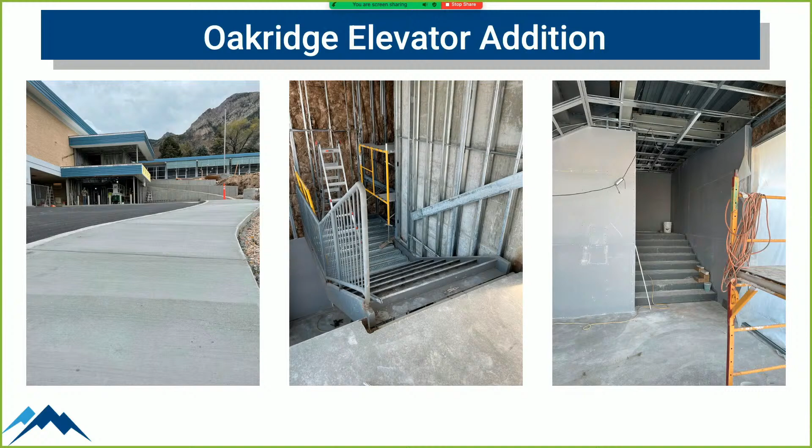So, new construction, we'll lead off with Justin on Skyline. You've had a chance to see the update there, and we'll talk through that just very quickly and then go to the photos that give you 1,000 pictures, show 1,000 words.

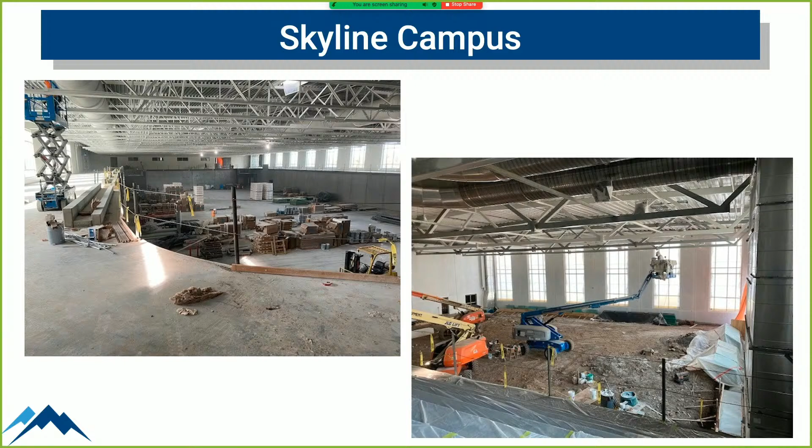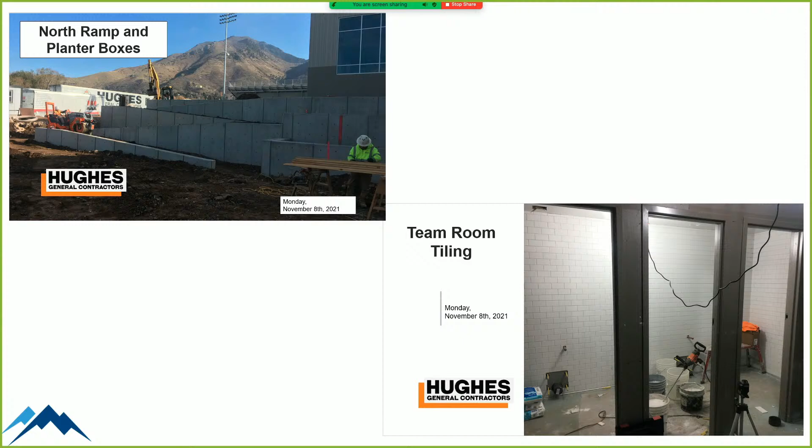You see the tile work down there in some of the restrooms below, in the team rooms, in the right-hand picture there, that white tile in the back. Paint in the team room, that yellow going in, ceiling framing and looking for lights and things like that in the lower right-hand corner.

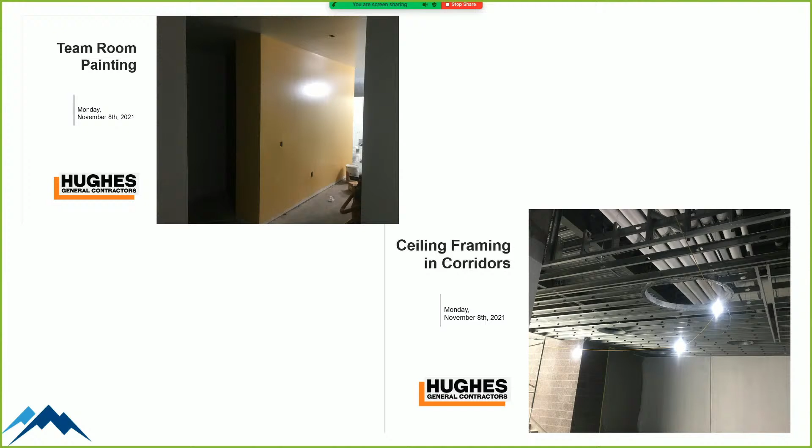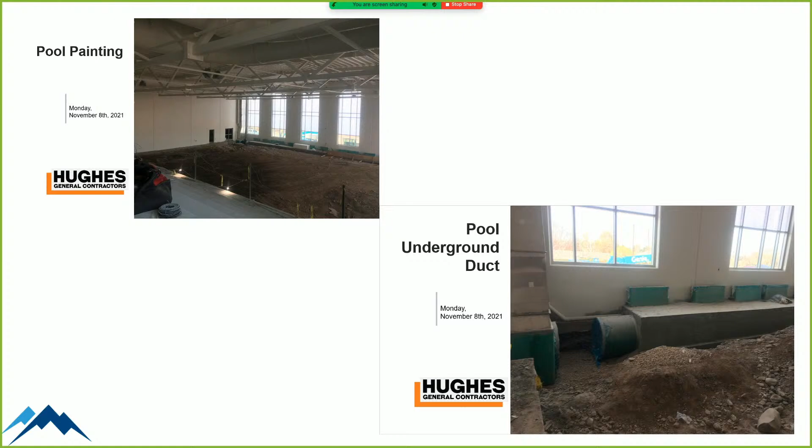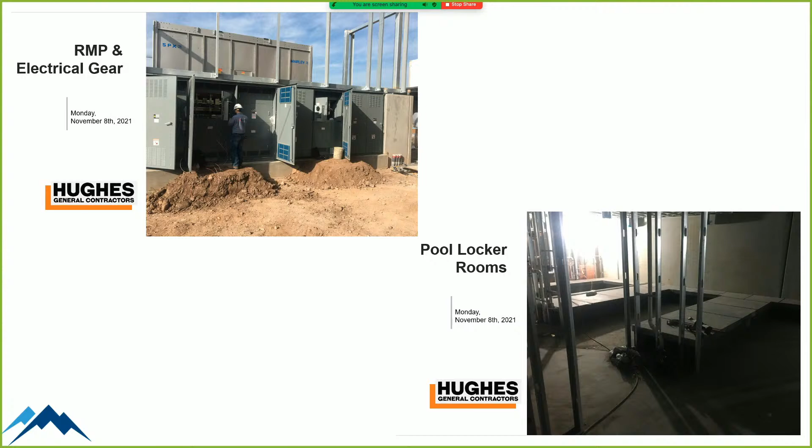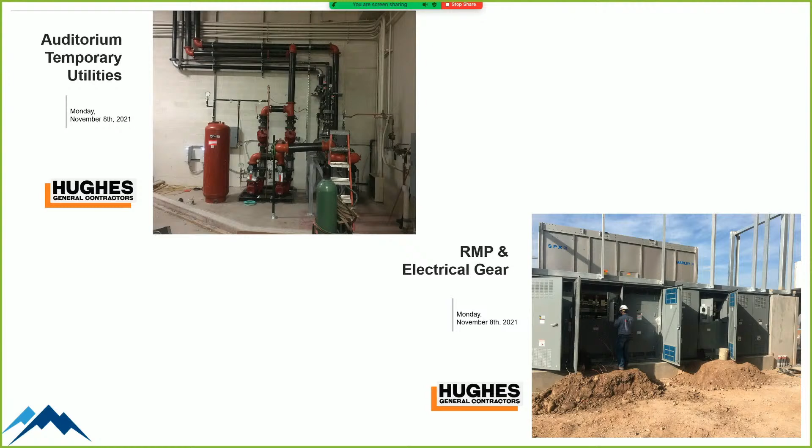And we're going to talk about change orders a little bit. We're trying to present to you as clearly as we can payments, change orders, and other items that we've done to advance the work. This is our attempt to take very complex tracking sheets and categorize them for you.

One of the things we wanted to talk about was the nature of change orders, because a change order is really a legal instrument to make a change to a contract document. It's not just the 15-page legalese that we sign. Contract documents include all of our plans, specifications, et cetera. So when Justin and I use the term change order, it means maybe 5 or 6 certain things.

For example, there's a change order that might be a no-cost change order. We want to swap something out, or add contract days. So that's a change order, but there's not a cost associated with it. There's a deductive change order, where we change something and get value back. And there's the dreaded additive change order, right? That's something that costs us.

Often the question is, well, what costs us? If the owner asks for a scope change, we ask for something else or something more, that comes in with the cost. If there's an error or omission in the drawing, there's a cost. I have an electric pump, but the electrical engineer forgot to show that power goes to the pump, and it costs $500 to run it there. Now that's a change order because the plans were not detailed enough to get them there.

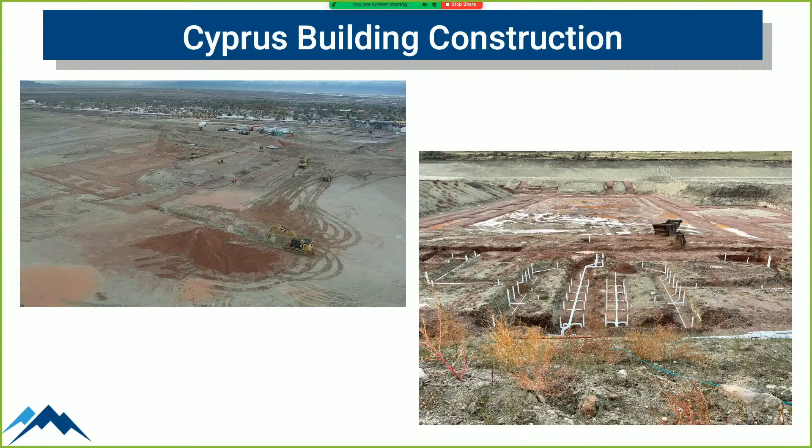You'll start to see some of that prep work happen as well, trying like nobody's business to beat really bad snowstorms and things of that nature. So there should be a good bit of activity, although I think there's been a good start that you were all able to witness while we were out there.

The next page is just, again, a similar tracking sheet. One of the items you see in your board packet today on the consent agenda deals with some value engineering. We were under the gun to quickly turn around a bid package, and I think we had 96 value engineering considerations that were thrown at us.

Under purchasing's advice, they said, well, if you think you're interested, take it. And if you know you have to do more research, we can always bring it back as a change order later.

In this case, a lot of these things, I think we listed a couple of simple ones. We had a very reputable cabinet manufacturer that said, hey, these are the cabinets that could save you money. We said, oh, that's interesting, we've never heard of that line. Let's take that line of cabinetry and do some research. When we got there, we determined it certainly wasn't suitable for our use and wore out too quickly. That's why we brought it back.

Same with the type of ball field lighting. It was of interest, we'd heard something about it. We couldn't not take it and then ask them to come back with it—we had to do it just the opposite. As we looked at it, it was more of a kit of parts. It wasn't a reputable manufacturer that we knew we could get consistent warranty work from, because they were assembling from three, four, or five suppliers to make a lighting system. After we got into that information, we said, oh, we don't want that. That's not of quality for our buildings.

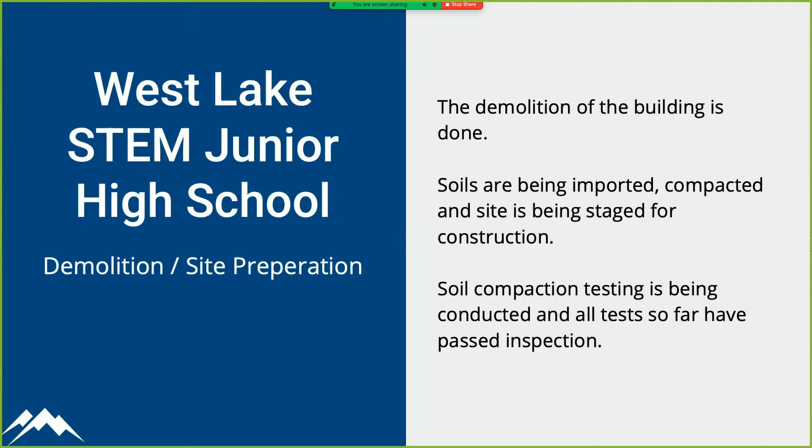Ben, could you change the slide? Yeah, thank you, good point.

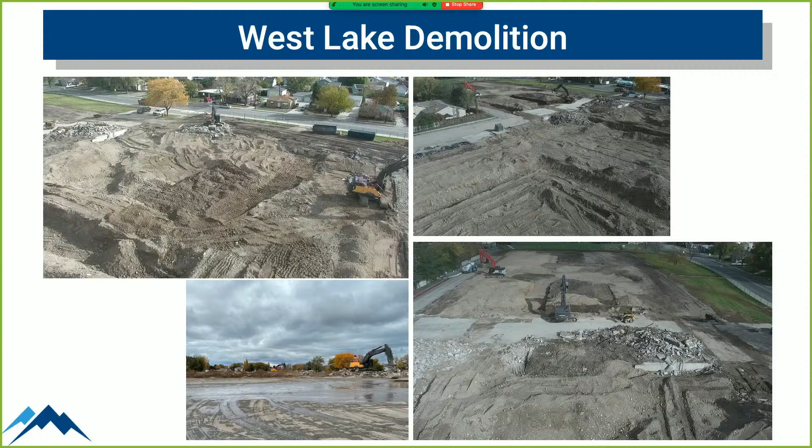Thank you. Some very nice photos from one of our guys, Jacob Perez, who flies the drone and does a great job—you can see some very nice images there. You're able to see kind of the progress as they were. This is not today by any means, but from the last couple of weeks as they were able to finish up and get the building out and dig out the footings. So I thought that aerial view is very nice.

Sorry. That's fine, you're good, Ben. Again, the same—yep, you got it.

Thank you, sir. The same tab we did for both Cyprus and Skyline. Good news is there's zero change orders to date right now, so that's good. Ben, would you jump one or two ahead? Let's see here—one more, please.

So the plan for bidding, we do it in two phases. The first phase is asking are you interested and qualified as a contractor to do this? Are you big enough? Do you have enough money reserves and staffing? That documentation was received by purchasing today and sent to us. The hard bid process will occur from the end of November through December, and will come back to the board for approval in January. So the rubber hits the road over the holiday season. It's extended several weeks because the holidays are tricky. We'll be coming back to you in January.

So again, just a refresher, you've seen the site plan. The building is going to move farther to the south, closer to the commercial area and farther from the residential, and will be a 2-story structure instead of the single-story structure that Westlake is today. Next image, please.

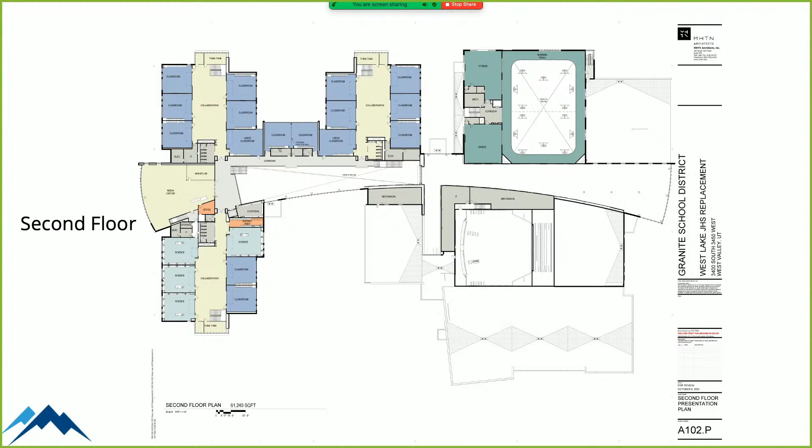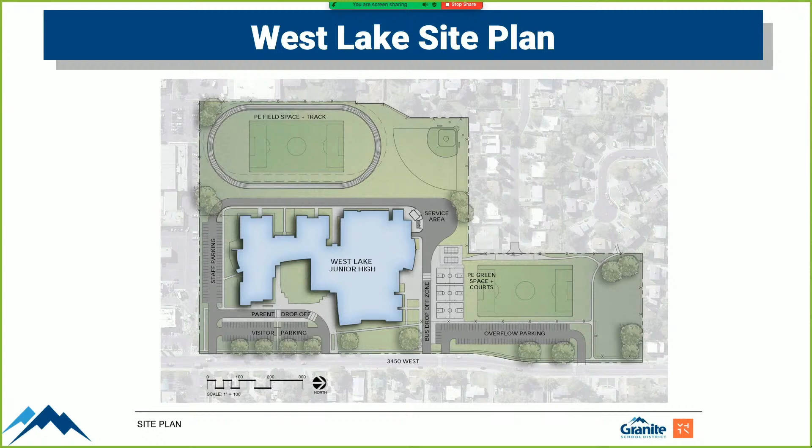Oh, yes, yes. They all have them, Julie. Everyone. No, Churchill does not. And which one? Olympus Junior doesn't either, they're running on dirt, but if you go to Hunter, Bennion, Valley, they all have some sort of old track. Westlake had one too, the old Westlake, and Madison. Yeah, they're gravel, Julie. Is this going to be an asphalt one? We're probably just going to pave this one. It's just as cost effective to do it, it lasts longer and has less injury risk. So we'll probably just pave this one. It doesn't grow weeds either.

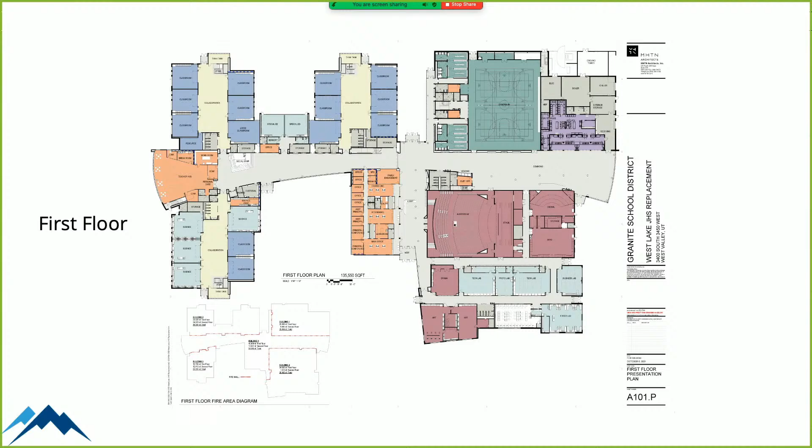Ben, if we could get to it, we wanted to give you a flavor of the exterior on this. For some reason the drawings came out more beige than they should. So the designer is taking cues from Granger High. They're within eyesight of each other, so we thought it would be good to use the same material and color palettes. In this case, it's a reddish brick, anodized aluminum gray metal paneling, and a grayish tone to offset it.

Okay, so have we reached out to the community at all on the color schemes? Because their colors are black and yellow, they're the Mustangs. Now, I'm not saying I want the bright yellow on the building, and I understand the coordination with Granger, but I can also see some community members saying, why are you making Westlake Granger colors? We're Westlake. Well, they're not even Granger colors. Granger doesn't have... well, I guess this has a bright blue. That blue is just something the architects rendered, the color selections aren't finalized. I know that, that's not my question. My question is, have we gone out to the community?

We're one community meeting behind where we want it to be. I look at this and it does look very similar to Granger. And while Westlake feeds into Granger, you know how it is when you're in junior high. You don't want to be known as the future Lancers. You want to be known as the Westlake Mustangs.

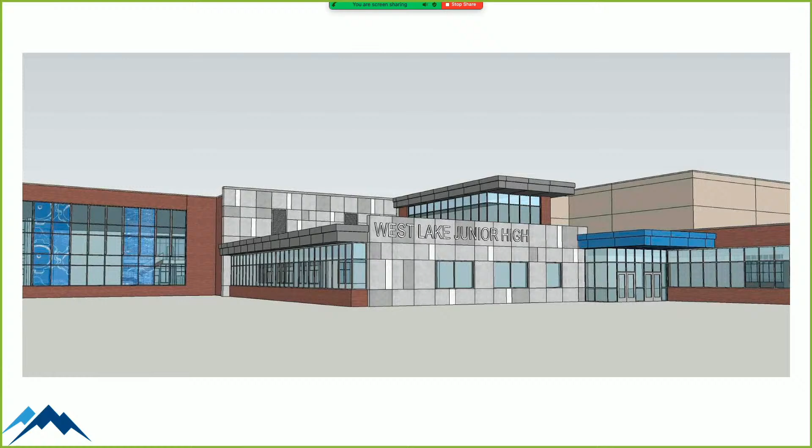The exteriors, we typically never see school colors. Does that make sense? Like Cyprus, you get yellow on the inside, not the outside. My bigger point is just we need community buy-in before we make this decision. I don't expect to see black and yellow on the outside, but I expect to see school colors on the inside.

Did you have a comment, Connie? My comment was only that Granger is gigantic red, and I would just as soon not have quite so much gigantic red. If you look up on the screen, you're seeing where it's not quite as much gigantic red. We've broken that up with other colors and materials because Granger is a lot of red.

Well, on the Westlake side, can you do some form of yellow instead of that blue? We could look at that. I just don't want anything that looks close to Granger with a window tint that isn't right. We could change a panel at the entry to give it some clear definition. We probably wouldn't use yellow window tint, so we'd have to look at something different, but we can play with some of those entry colors with the community council.

This is just their rendering. I don't think we've picked yet.

So you will be having another community meeting? We do need to, yes. Will you let us know when that is? Yes, we'll need to work with Tyler to schedule that. He's been unavailable on the last couple of calls, and we just haven't connected. We do know that we're one community meeting behind.

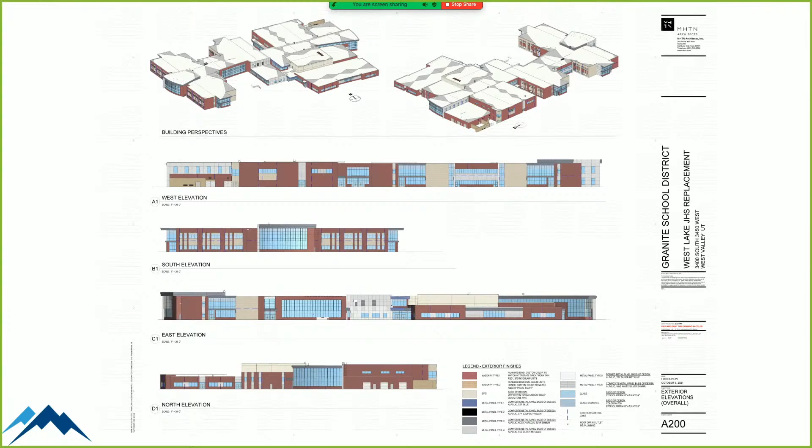All right, next on our agenda is a reconfiguration update, just kind of bringing board members up to date, and reminding us the steps that we follow for reconfiguration.

This will be led by Ben. I can't physically see Ben. Yes, thank you guys for your work, awesome job, well done. Ben, are you just giving this presentation from your little corner over there? I'm pulling this graphic up. Ben left a half hour ago.

I'm wondering why it's not coming up on the screen. Oh, I see it. The good news is it's a one-slide presentation, so you don't have to run back and forth. So that is the good news. Yeah, I'm a little stressed out about that. I apologize, we had that issue. That computer is still burning up, there's a hole in the desk over there from the heat, so it doesn't like to run Zoom anymore, apparently.

I don't have this in front of me, I apologize. I'm just pulling it up on my iPad so I can see it as well, because I had planned on using that computer for this.